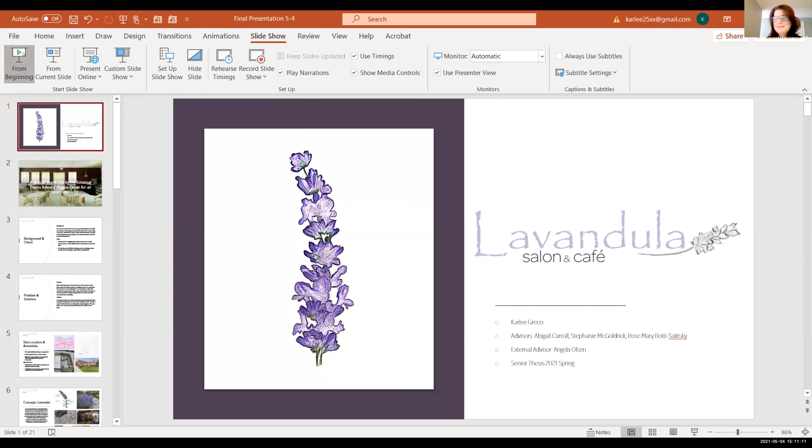Is it in presentation mode for everyone? Okay, I'm Karlee Greco, and this is my senior thesis presentation of Lavandula, Salon, and Café.

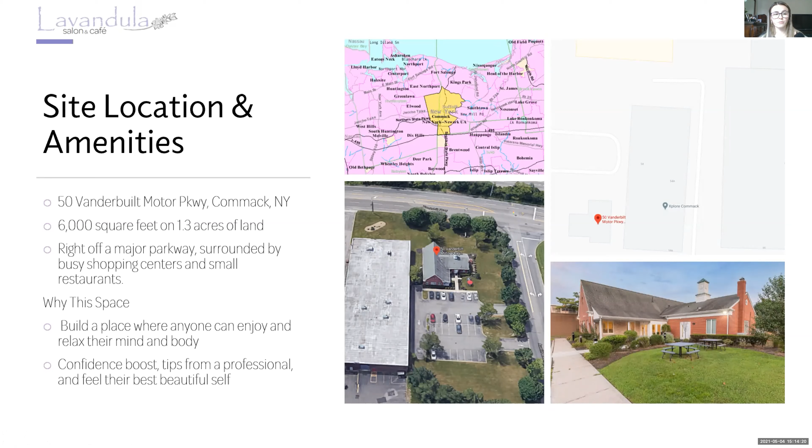The concept for this is lavender, thought of for this cafe for its natural and neutralistic color palette, also for its multiple purposes once the physical plant is broken down into different parts and segments. Lavender is also used in various ways to benefit one's health and physical appearance.

The plant is also believed to promote relaxation and treat anxiety and depression. The color purple is commonly associated with creativity, peace, pride, and independence—all of which I wanted to embody in this cafe and salon and in the people who are always there.

My parti model and exploration are parts of a whole. Once this plant is broken down, you'll see that the whole entire plant is known as a spike, and these smaller pieces are a corolla, calyx, and a peduncle, which is also a stem. You'll see these parts throughout my design process and in the furniture pieces and selections throughout the project.

Going further, I wanted to plan that this is a WELL Standard building, focusing primarily on air, water, nourishment, light, and mind.

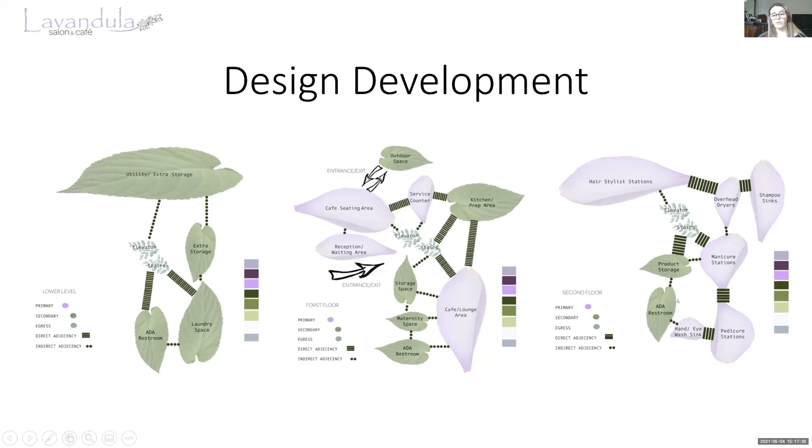Moving to the second floor, you would go up the elevator or stairs to the hairstylist stations, and going back further, you would go to the overhead dryers and shampoo sinks. Then moving down a small hallway, you would enter the manicure stations, product storage, another ADA restroom, and hand and eye wash sink and pedicure stations.

So as you can see, the floor plan did change a bit once entering the 3D process. On the first level is the reception cafe, service counter, kitchen prep, ADA restroom, maternity space, wellness space, employee break room, lounge area, and outdoor patio. But mainly in scope is the reception, service counter, and outdoor patio.

So for this first perspective, I mainly wanted to focus on the reception, or more of a check-in point. When you first enter the building, you would come to this check-in point and see where can I go from here, because on the second floor there is another reception desk, which you will see later. And I wanted to focus mainly on the well points of light and air.

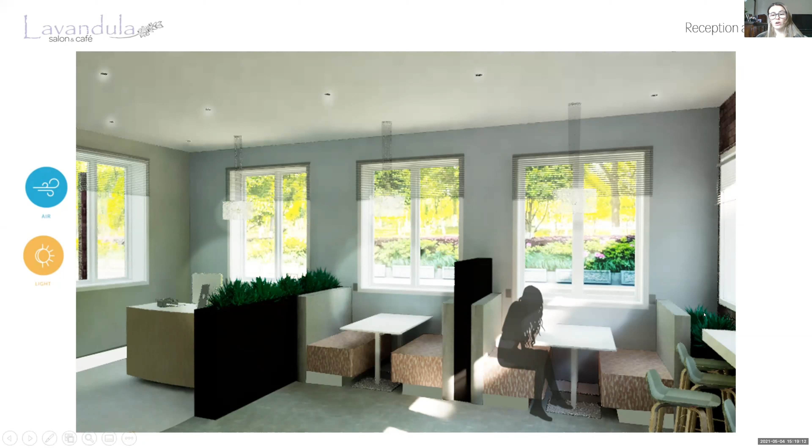This is because these light pendants can be controlled by the occupant, as well as the recessed cans, and the shades on these windows can also be controlled by the occupant in the space, mostly for maximum daylight capacity. And the air in this space is a smoke-free zone, just for the maximum capacity of the best quality of air. Also, as you can see in these planters, these are going to be locally sourced herbs that can be grown and used in recipes for the cafe.

And as far as nourishment goes, this is a lavender growing wall to be implemented into recipes, as well as water usage to see the filtration of how water is being used in this cafe.

Moving to the outdoor space, you can go through the back doors leading to the outdoor patio with all modular furniture integrated in, so if you want a smaller group you could do seating arrangements of 2 to 6, and the umbrellas as well as these canopy seats also have lighting integration into them. So that implements lighting which, when it gets duller outside, you can turn on or off depending on the occupant as well as mind.

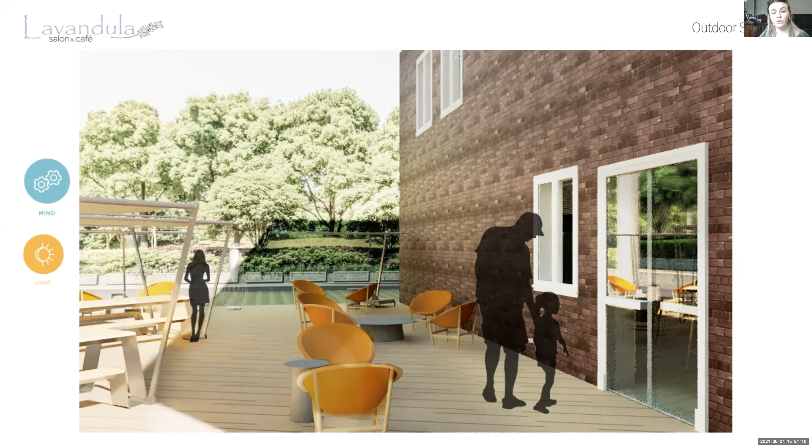Moving to the elevations of this space, we can see clearly that these booths and this reception desk are at ADA height for accessibility purposes. And these numbers are adjacent with the key plan, so each number is keyed to the direction that you are looking in.

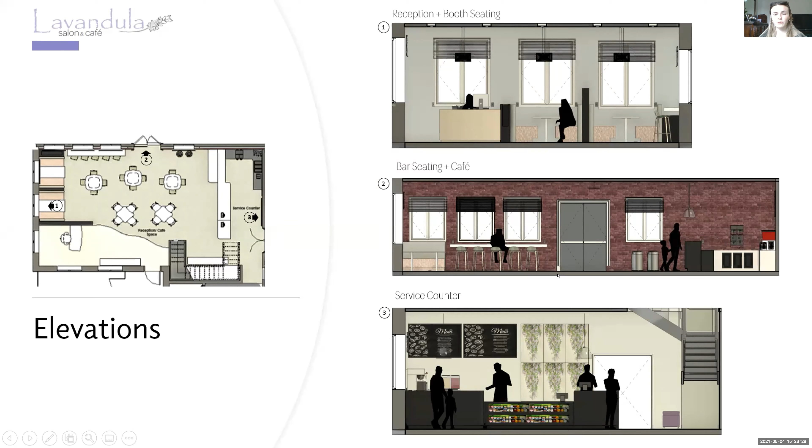So the second floor has the second reception and waiting area, the hairstylist stations, hair wash and drying stations, product storage and mixing area, and nail technician stations.

And again, mind — when you come to a hairstylist or anything to do with your hair, you usually would like to de-stress, and when you come here, you talk to them. They're more like your therapist than your hairstylist. Usually you talk to them mostly about your entire life.

Moving to the nail stylist stations of the pedicure chairs and the nail drying table, focusing mainly on air filtration, and again, mind. More air filtration because typically in a pedicure and manicure station setup, they're using a lot of chemicals that can be harmful to the body, more so with nail remover and anything that has to do with a spa treatment. So the air filtration systems on the second floor are a main key focus.

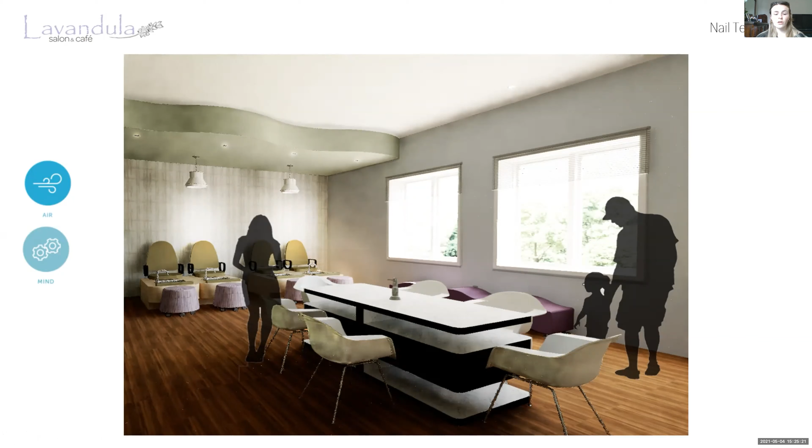And again, mind, because when you're trying to relax and get a pedicure, you really want to de-stress and just relax when you're doing that. And again, just some enlarged floor plans.

One of the hair stations, I really wanted to focus in on having a more bud or petaled shape around just the hairstylist stations, and also having these pilasters, which I was introduced to by my external advisor.

Just to absorb sound with acoustical panels on them, and the differentiating floors, because most of the time, people who are getting their hair done, if the stations are too close together to one another, they'll be bumping into each other, or if they have a moving station with them or a cart, they'll be too close to one another.

So I did make sure that each hair station was per COVID guidelines, and also just to make sure that they each did have enough space. They were 7 feet apart from the center of the chair to the next center of the chair.

And some materials that were used in this space are all bleach cleanable, just for COVID. And then moving to the next enlarged floor plan, speaking about mind again, and including the water standard for well and all the materials that were used in this space.

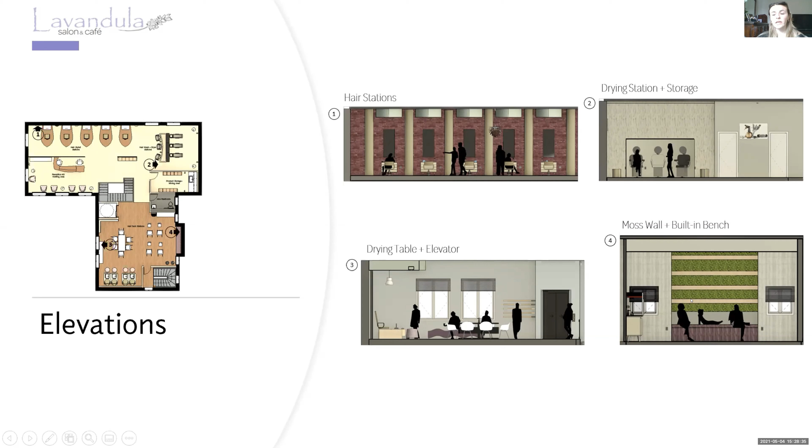Thank you. That is my presentation. Any questions or comments?

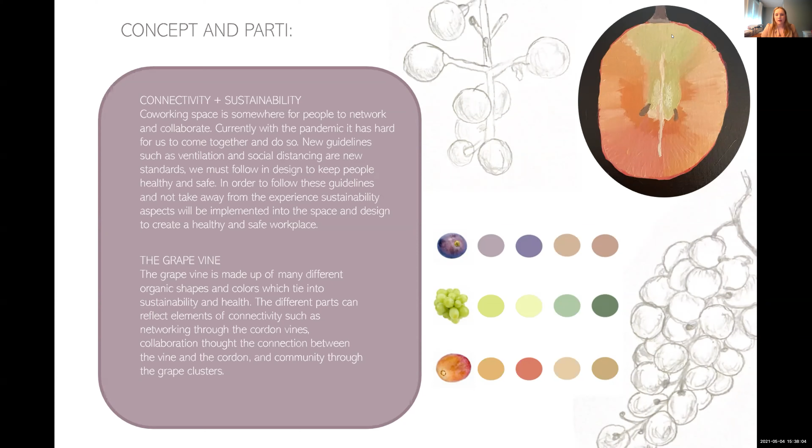On the right side of the screen are a couple of sketches that are also in the background of the slides throughout the presentation to show process. In the upper right corner is my parti exploration. I took a cross section of a grape to see what symmetrical features and colors I could use throughout the design, as well as a color exploration with three different colors of grape.

The program of the existing building includes three floors. The first floor is more for networking and collaboration, including flex spaces for work, community spaces, a public hall, and other amenities.

The second floor is more based on focused workspaces, including designated desks, private desks, and multi-purpose rooms. The multi-purpose rooms will also serve as private offices or meeting rooms that can be rented out. The third floor has a smaller footprint, including a library and an outdoor workspace.

I wanted to make implementations to the exterior of the building as well, to really create an attraction from the outside. Through this, we use an abundance of natural light to bring people in, since it's a nice work environment with daylight throughout the building, so it won't feel like that dark, claustrophobic workspace used before. This will be a new implementation.

Operable windows will provide proper ventilation, leading back to that source of staying a healthy and safe work environment. On this roof deck, it shows some visual interest. Not a lot of workspaces have outdoor areas, and this will promote sustainability along with the safe and healthy environment of social distancing. Right now we're doing a lot of things outdoors, and this will help with that as well.

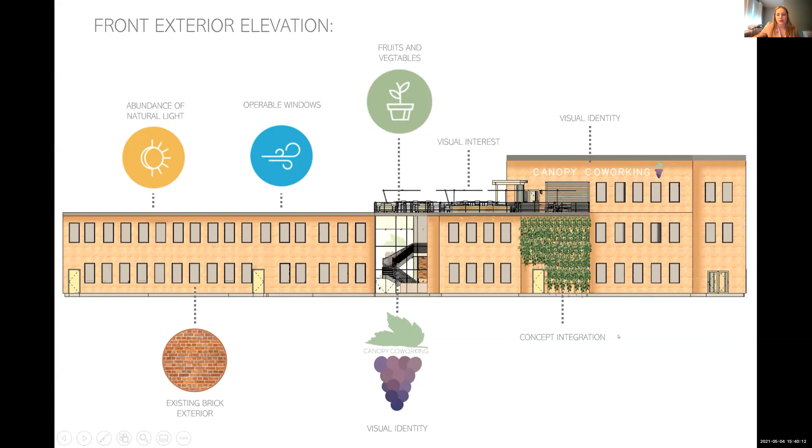On the roof deck, there is a garden that provides fresh fruits and vegetables to the kitchen areas and the cafe. On the exterior of the building, there's also visual identity with signage and this mural on the inside that's visible from outside. There's some concept integration through vines around the building.

Leading into my first focal space, which is the reception, the configuration of this space was chosen based off how people enter and what people go to first when they're entering. So if it's a new member that's just signing up, or someone coming in for the studios or a meeting, they'll come up to the reception and can be told where to go.

If it's a member, they can enter with easy access to the stairs right in front, and a bike storage room, which will promote them riding their bike to work and being a little bit healthier and safe for our environment. They also provide shower and changing rooms to help promote that. Leading into this main reception area to the check-in, there's a mail room on the left-hand side, so people can pick up or drop off their mail before heading to their workstation and checking in. Then lockers in the main lobby as well, and the elevator for proper access to the second floors, and some seating arrangements.

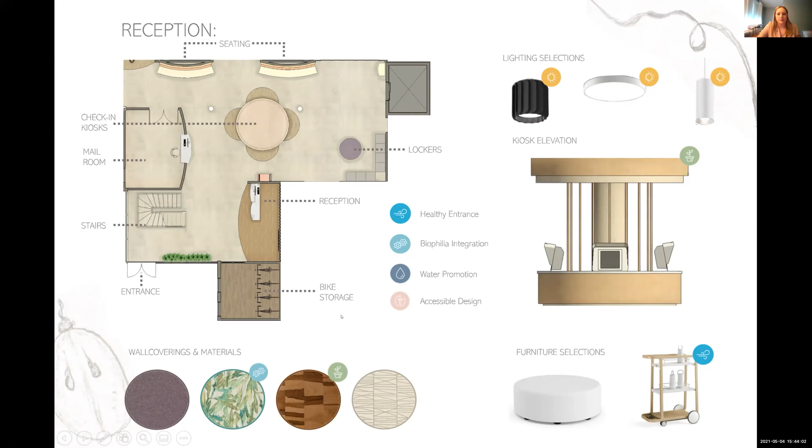Throughout this whole space, a lot of the spaces are multi-use. I feel as though that's very important for this type of work environment, so there can be a lot of different integration of activities. These private call rooms can be used for just a phone call. They have monitors in them for if you have to do a Zoom call, or they can just be used if you need to take a second out of the work environment.

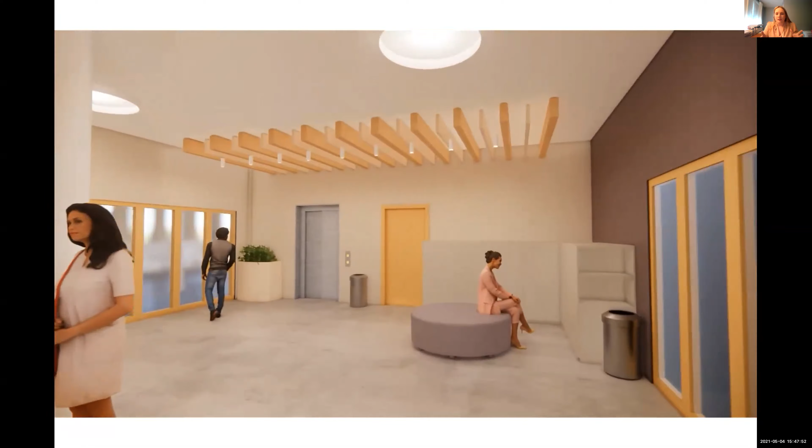This is the lockers with a ceiling detail of baffles on the ceiling. Then turning this corner right here to go down the hallway into the flex space, you meet the bathrooms and the little seating areas right outside of them.

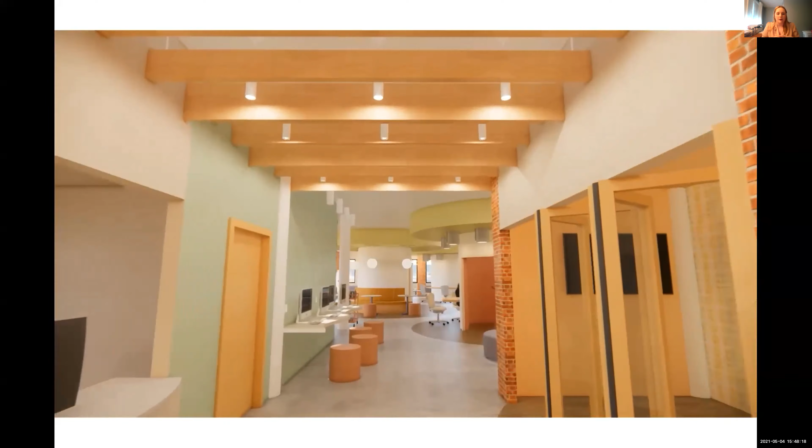Traveling down this hallway, there's the mailroom on your left-hand side and the print equipment room, as well as the two multi-purpose rooms on your right-hand side that can be used for multiple different things. And then the computer counter, where you can maybe use some programs that you don't have yourself or send prints over to the print room.

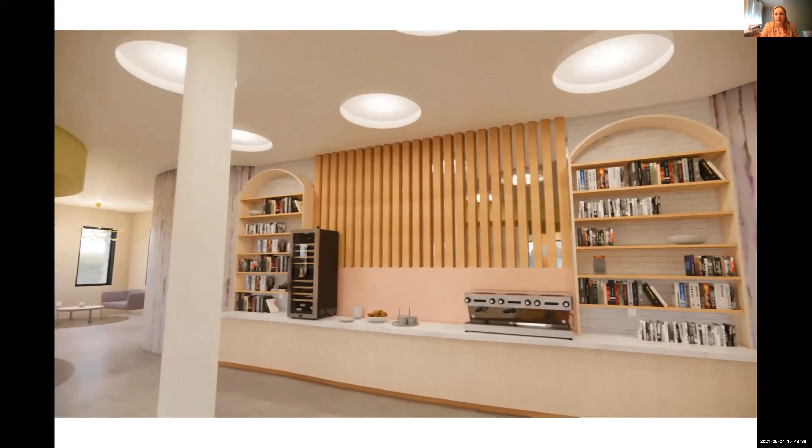Coming into where the private call rooms are surrounded by seating, you see someone taking a phone call in that room, and then the seating areas for workspaces around them. And the cafe located right next to those so people can get a drink or some food from the garden upstairs that will be available for anyone, and some books kind of for storage or use for anyone.

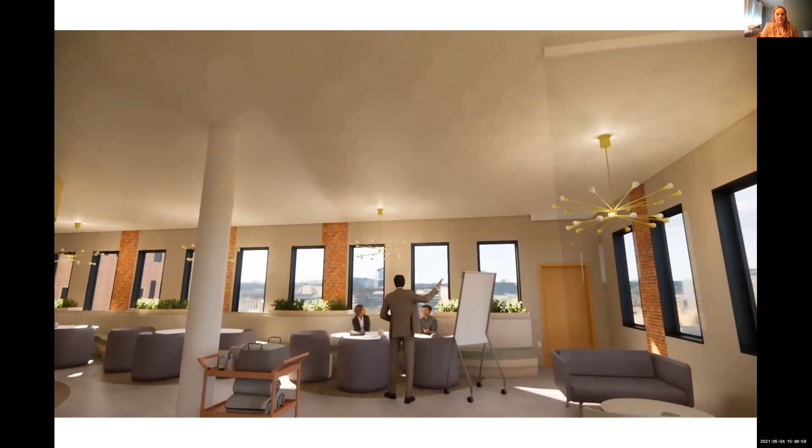And leading over to the touchdown spaces with the custom bench that leads all the way down the wall for some visual interest in the space, creating a focal point with some biophilic integration as well. And then leading back to the front of the flex space with two more multi-purpose rooms.

As you can see, there's the sanitization carts around the whole space, leading over to that locker space that is right near the workspaces, with some acoustical panels on the wall for detail as well.

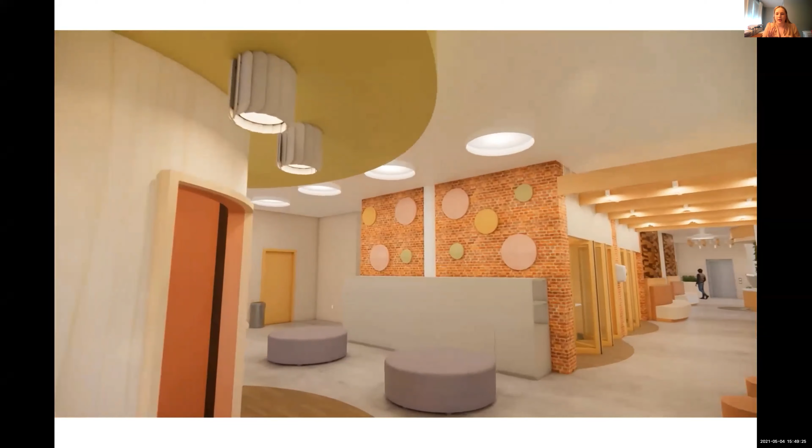Leading up to my second floor, which is not in scope of the design, this is the floor that's a little bit more focused and for workspaces that are a little bit quieter. On the left-hand side, there's a designated desk area.

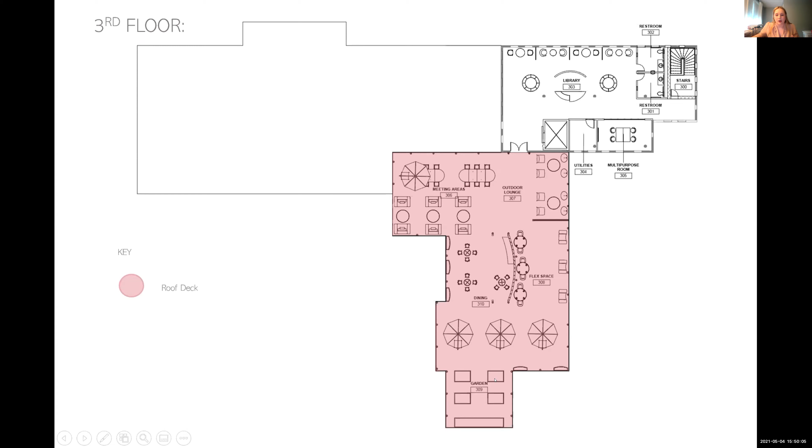This again shows a more focused area of that, an enlarged plan of the outdoor deck, showing those same spots. The furniture selections for this were really chosen for durability of the seasons. With an outdoor space, you want something that's going to last very well, especially up here in New England. And they all also have that organic sense to them.

The wellness implementations that are really brought out here are exterior active design and physical activity spaces. This outdoor area promotes people to get outside, get some fresh air away from the office, and really just be active. There's spaces for people to work out if they want to, and then those shower and changing rooms really promote them to do that as well.

There's biophilia integration with the large grass space area and some green walls and flower boxes, and the air quality, especially since it's outdoors, is very strong. The materials for this space are a lot more simple and just integrate those colors into it, because I didn't want to take away from the outside space and being in that natural environment.

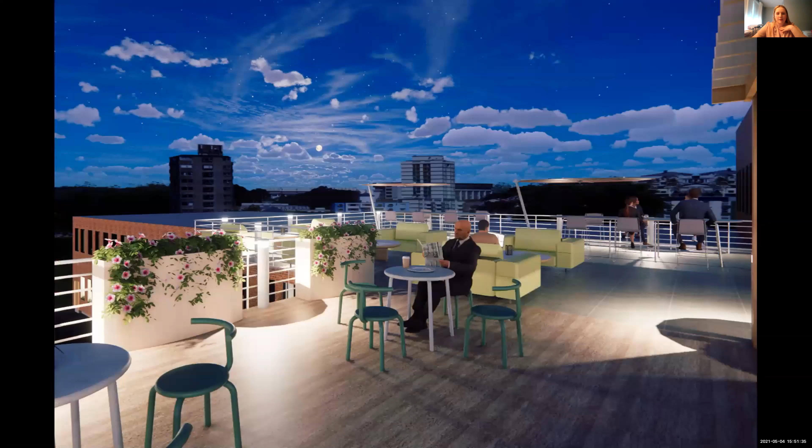This is a night perspective, and I just wanted to show this to show that it promotes people to even be out here at night with the nice lighting, and it can be a space that is used all the time.

So walking through that roof deck shows the meeting areas, both tall table and some lounge meeting areas, and then that dining area with the covered area for some networking events that can happen out here as well.

And that grass area where people are kind of working out, they can do some meditation, yoga up here, and the garden area as well with the covered seating.

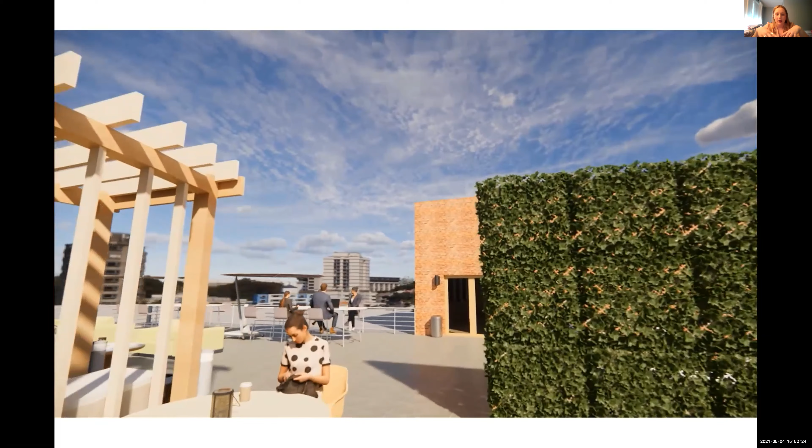Leading around the corner back to the front, some flex spaces where people can do some work on their own or just sit outside, get some fresh air. And then a separation, so if people are trying to focus over here with that green wall, they can focus away from the outdoor lounge area that is out here as well.

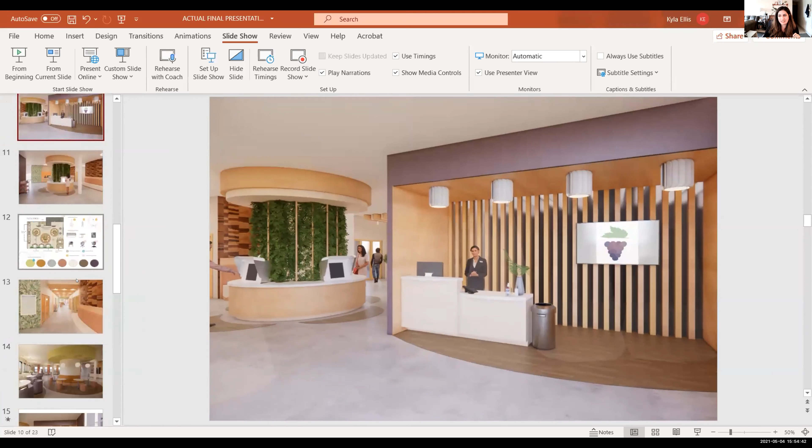You flipped through your perspectives so quickly that I wanted to see them because I know you worked so hard and they're so beautiful, but especially on the first floor, I feel like it was one second and flip, and I didn't really get to fully absorb it. I know you're probably nervous and speeding through it because you have so much to talk about, but I just wanted to point out the detail in them. I think they turned out really fabulous. Your use of materials was very descriptive. I like how you brought up important topics like acoustics and ergonomics, which are important in a workplace. And your walkthroughs were super helpful to understand how the space really feels.

Overall, I think I might be biased, but I think you did a really great job and I'm very proud. Thank you so much for your help. Yeah, of course.

I think you did a very thorough job, like Christina said. I think that all of the elements were very intentional and went back to your concept, which was nice to see that it carried through. Even the background on your slides was a nice little touch. The walkthroughs were really nice to see.

And I think that it's definitely a concept that will be necessary. I think it'll be interesting to see how this kind of concept continues in the future with places like WeWork and what they've gone through. But yeah, I think you did a super, super great job.

I also think that the rendered floor plans were really nice. It was very clear to see what we were looking at. So yeah, I think you did a great job. I don't really have many things to critique, I feel like. But great job, thank you so much.

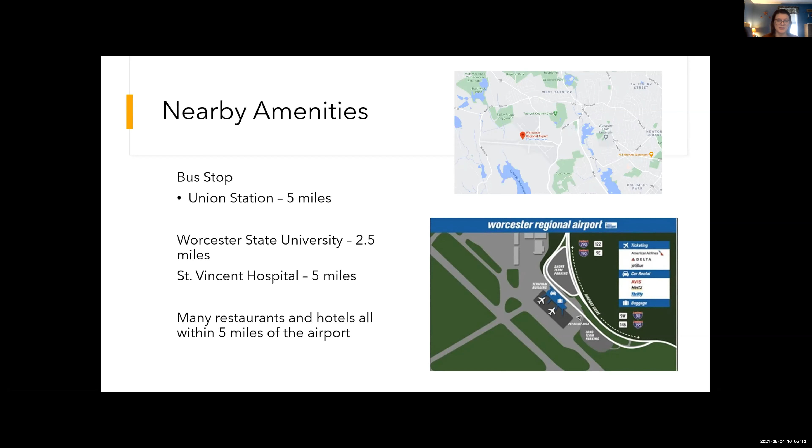So if you look lost, go up and ask if you need some help. There's also the check-in desk for the airlines and the offices behind it. There's a sundry shop that offers a little bit of food and some necessities, bathrooms, baggage claim, and the car rental.

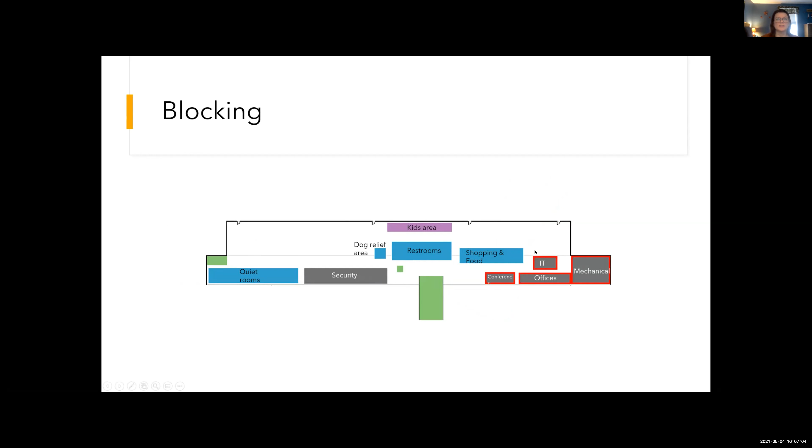So this is my blocking diagram for the second floor. It's changed since this, this is what it was at midterms. So what it started out as: you would come up the stairs, security, quiet rooms. This is the gate area, have a kids area, dog relief area, restrooms, shopping, and then back of house. But it's now since changed.

So you come up the stairs. To the left, you enter into security, and behind security is the child play area, and then there's 2 quiet rooms here. The gates are still all along the back. Here's the restrooms with the dog relief area, the family restroom, and then there's nursing rooms in the back of house.

So my first focus space was the play area. I noticed a lot of airports didn't really have a space designated to children. This airport did not, and I wanted to make it interesting. I didn't want to just stick a playground in because that's boring, so I wanted to find something that related to my concept.

So I have this play structure in here that's made out of wooden slats. The good thing about this is that not only children can play on it, but also adults can play, and no matter what your limitations are, you can find some ways to play with this, whether you crawl on it or if you run or jump. It can be used in whatever way you want, there's no right way to use it.

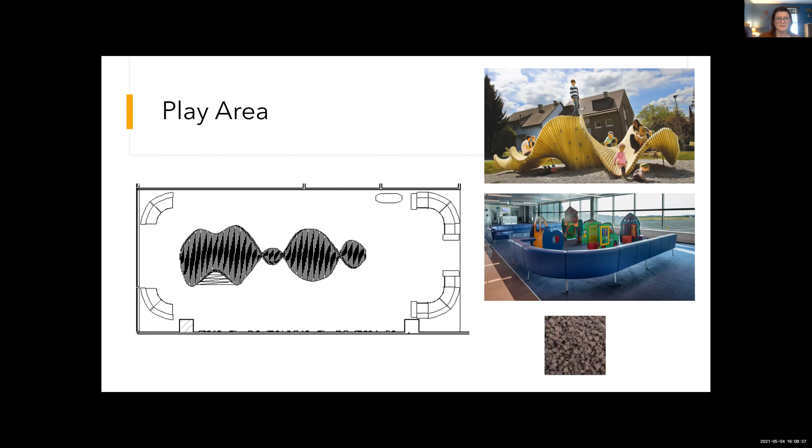I also wanted to do some cool and interesting things for the ceiling for the airport, since if you do something interesting on the floor, nobody's going to see it because there's people walking. So if you're going to do something interesting, you should rather do it towards the top where people can see. So there's custom lighting which mimics the lines of a topographic map for this.

My next space is the gate area. At the top, I have a picture of what I was thinking of doing at first, to copy the topographic lines of a map and make curved seating. But in implementation of that idea, I realized that there wasn't going to be enough seats for everybody.

So I switched to my second idea where I do have curved seating, but I also have other types of seating, because usually when you go to an airport they only have this bench seating here and there's no other options, and that might not be the most comfortable option for somebody. So I have the bench seating, but also this curved soft seating and power tables for people to charge their phones with stools, and then this fractal seat, which will allow people—because being in a big space can make you feel overwhelmed sometimes—to feel a little closed off, even though you're not.

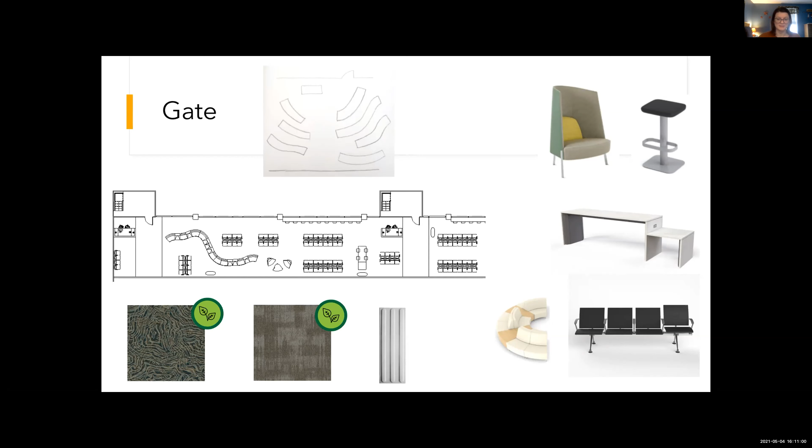So the restrooms are the third focus space I'm focusing on. Not only are there restrooms, but also a dog relief area, two restrooms, a family restroom, and two nursing rooms. I decided to implement a nursing room since this airport doesn't have one, and I put one on both sides because there could be transgender people or single dads raising a child who might want a private place to nurse their children, just like women have.

So the doors for these stalls, the restroom area, are open.

A lot of places are starting to implement lights on top of restrooms to show if they're occupied or not. But if somebody is colorblind, they won't be able to tell the difference between those lights. This design prevents the need for those lights, so you can just look and see whether the door is open or not.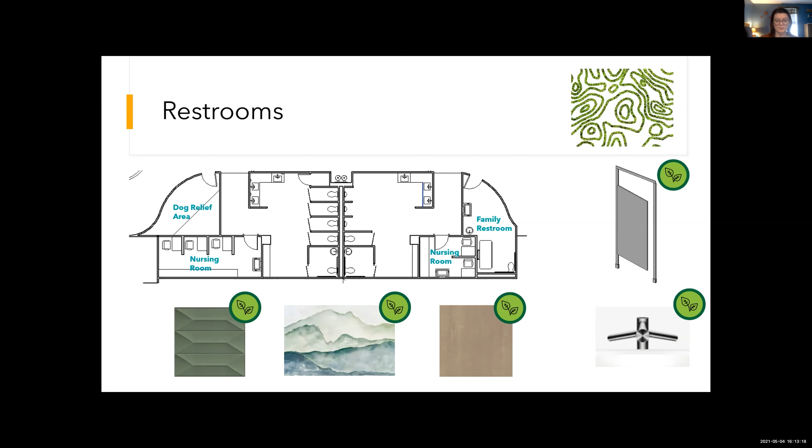Thank you. I'm going to stop sharing for a second. I have a walkthrough I need to pull up. It wouldn't let me put it into my presentation.

All right, so this starts in the gate area in the back, and you go by seeing all the different seating and the different materials.

Then you can see the white line on the bottom, which is the tactile flooring that people can follow. On the left is the green wall next to the water fountains.

Turning into the bathroom, there's not only a countertop in the front, but also one in the back, so if somebody wants to just look in the mirror, they have a space instead of taking up space at the sinks.

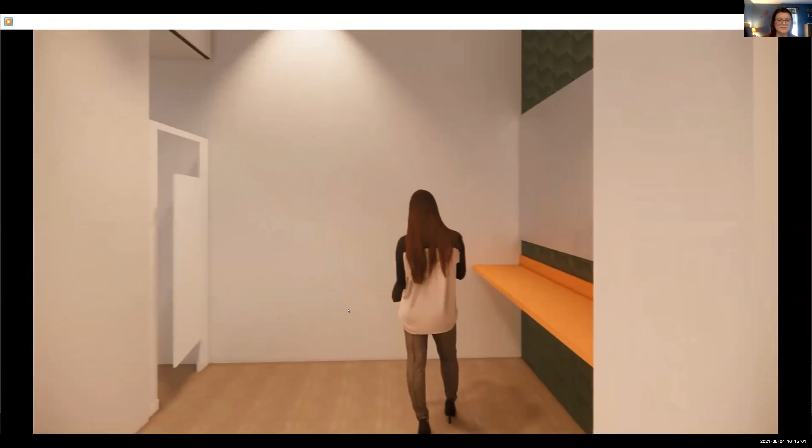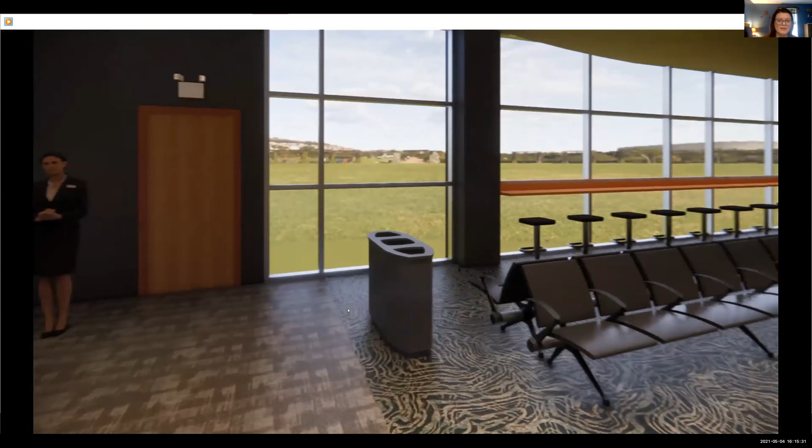Continuing onwards down the gate, we're going to get to the end and arrive at the play area.

And that concludes our presentation.

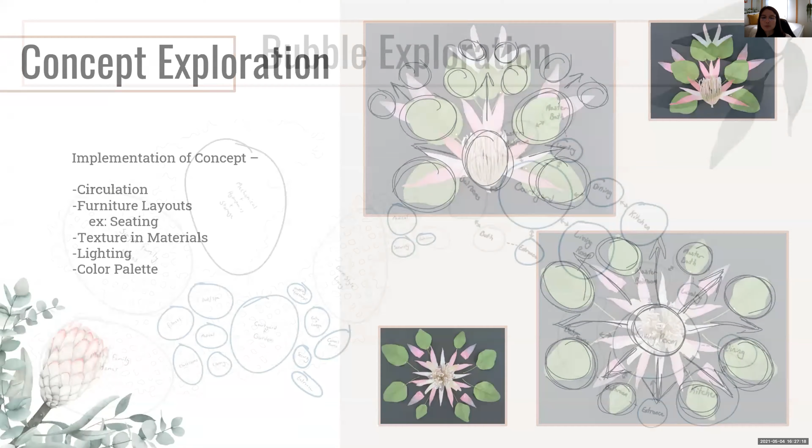This was my bubble exploration that I had at the very beginning. I took the initial site and figured out where I wanted these areas to be on the actual plan. Then I played around with how I wanted the floor plans of the residence areas to be, where you can see I have a courtyard area in the center localized between all the other necessities, or I also have a basic living room that doesn't have an outdoor private courtyard.

Now this is the overall site plan of the sanctuary. The residential expected capacity for single family units, in this more olive green area, is expected to be around 68 to 85 occupants, with an average household size of 4 to 5 people. The multifamily units, for bigger families or a larger community of people, shown here in lighter green, are expected to have 54 to 72 occupants, with an average household size for double families of 6 to 8, and for triple families of 9 to 12.

And then the dorm style units, all the way over here on the opposite side, are expected to have around 120 to 160 occupants, with an average household size of 3 to 4, but per unit would be 15 to 20. So overall, it's expected to have a capacity of 242 to 317 people.

So now when you actually walk into the area in the site plan of the bunker, there are going to be two different entrances. The main one will be coming in from the courtyard area right off the actual main road. You would have the main courtyard area where there would be a bunch of other areas and activities to get people out and congregating, making for a more communal, normalized living.

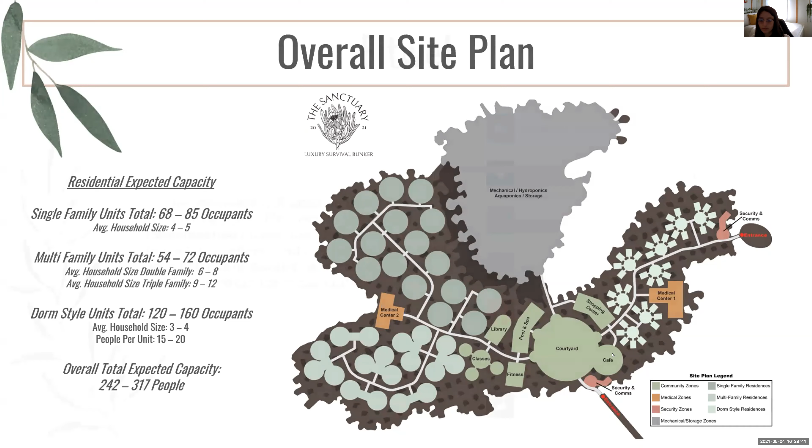Now, I did want to focus on Fitwel since this is a disaster relief and survival area. Fitwel would fit the best with it because it really looks at the impact of community health, supporting social equity and focusing on the community itself, providing healthy well-being for the communities.

One way I was going to incorporate that was some of the technology that would be used within the actual space. These are two things I found during my research: the Sky Factory eScape and SkyV. These are digital LED monitors that display the outside world and sky, working with circadian rhythm, as well as allowing anyone to choose a different outside view.

So you would still have windows within the space, and you'll see further on in my presentation where you'll be able to have your own view of maybe your own hometown or whatnot, and they would all combine together into one big 360 view throughout the whole entire house.

And then this other one I have is the Ketra lighting system using the Athena lighting controls. This is very similar to the lighting where it works on circadian rhythms, but this is more focused on daylight sensoring and adjustability, creating darker and lighter settings since you don't actually have the natural daylight of the sun. This is going to provide an atmosphere that gets cool and warm during sunset, sunrise, evening, and noontime.

Now, some of my focus spaces that I'll be having in this thesis are my security, the courtyard, and some of the residential areas. Moving on to the very first security area, when you walk in, there is going to be a centralized area of waiting and seating throughout the space where you're going to be dragged along.

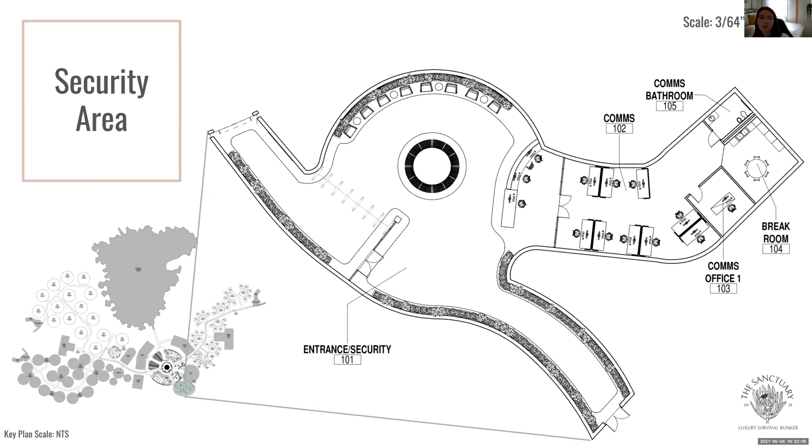And then just some circular seating and plants and stuff to bring in that nature.

Now this is the courtyard area. This is where you would be entering after you exit the security. This area here is going to be the biggest community space out of the whole entire bunker.

You're going to have seating areas with raised platforms of terraforming, where you're going to have a bunch of areas to play around in and kind of just relax and use it as your own space. You also do have the cafe that comes off of it with some actual outdoor seating, just in case you don't want to sit in there, and it kind of makes it feel like it's more of an outside space.

There also is a centralized column area that does have a waterfall feature to still kind of bring in this cool and relaxing feeling, focusing on that wellness of humans and everyone in there. And then there are actually two communal gardens.

Now there is an actual hydroponics and aquaponics and storage area in the very, very back of the bunker, which does have the main facility where it would be supplying all the needs and everything that's needed to survive in the bunker. But this community garden is to kind of bring together everyone, as well as being able to pick fresh herbs and stuff that you can keep for your household.

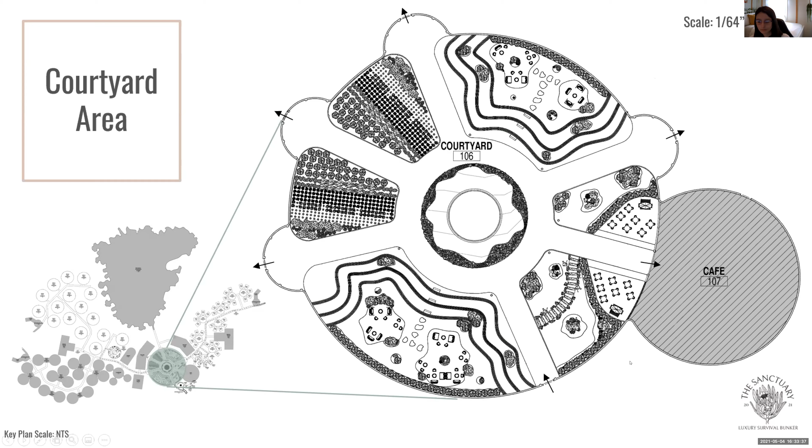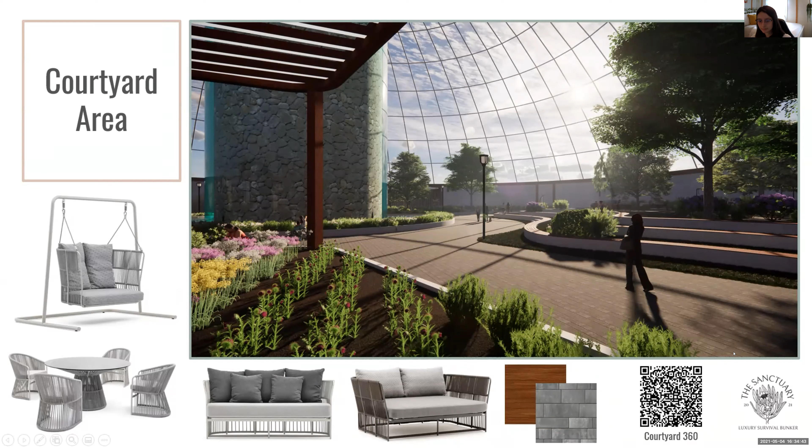Now this is going to be the walkthrough for the security and courtyard.

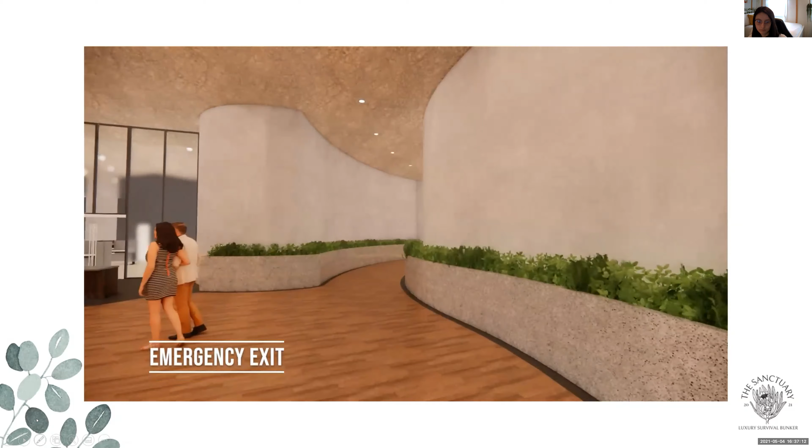Okay, now moving on to the residential area. This is one of the focus areas, and I decided to focus more on the single family units, as well as give you a little taste of how the layout would be for the dorm style.

What is expected in this area is, like I said earlier, the household size average of 4 to 5. You do have 4 bedrooms, as well as an optional flex space, which can be turned into a bedroom if you want. So when you do walk in, there is going to be an open floor plan area where you have your living room, your dining room area, as well as a nice sized kitchen.

Right when you do walk in, if you look straight ahead, you will have a private yard area similar to the courtyard, but it's more of your individual space where you can have maybe family come over or friends come over into this one individual space instead of having it out in the public.

And then as you gradually go around counterclockwise, you do have the laundry area that has some storage for any mechanical or just in general storage for furniture and items. And then you have the master bedroom with a walk-in closet, as well as a master bath and a separate water closet.

Going on, you have the 3 extra bedrooms that are pretty much the same size with the same closet. You do have an extra bathroom here for them to be using, as well as the flex space down here and a powder room right off the entrance.

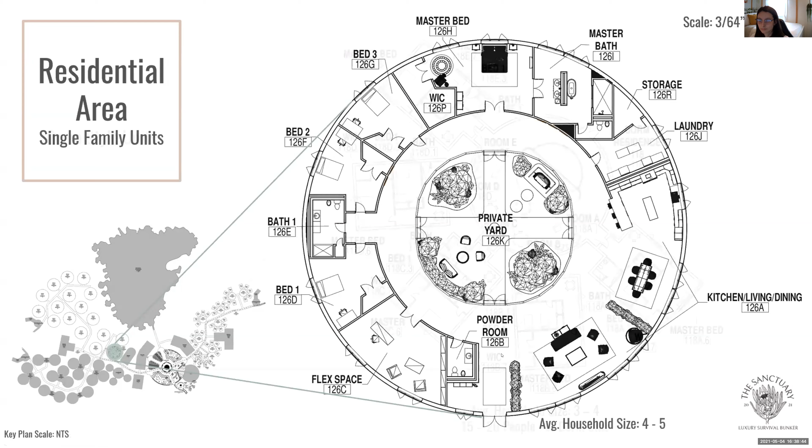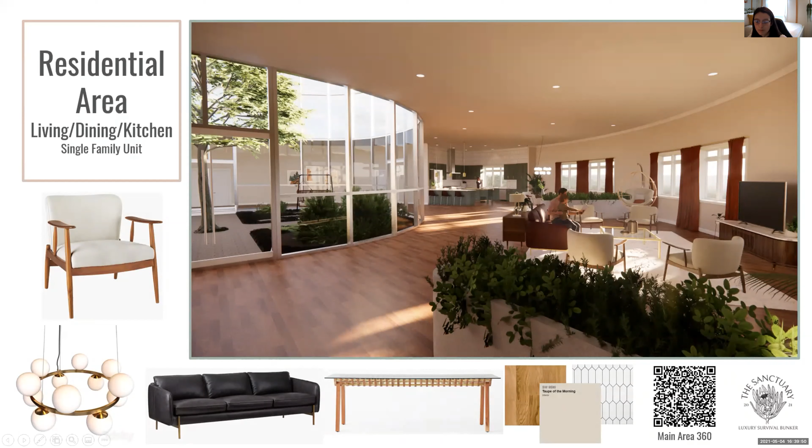Now this is the perspective of the living, dining, and kitchen area for that single family unit. You can see that I brought in a lot of nature and natural colors, still using texture, going back to my concept. I have a lot of leather and wood, natural spaces, kind of still bringing in the overall community. You can look through and be able to have a bunch of people come over within that actual bunker space. And then there is also a 360 panoramic for this space.

And then this is the single family bedroom and living, kitchen, dining walkthrough.

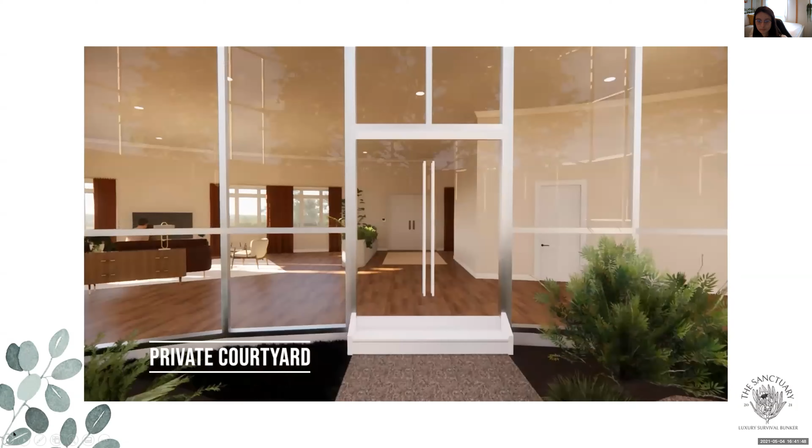And that is my project. Thank you to Rose, Stephanie, Abby, and Jill, who unfortunately cannot be here today, for their help with my questions and comments for my project.

Is there any questions or comments? Also, I apologize, the walkthroughs were supposed to have sound, I don't know how to fix that. Oh, they did have some sound? Oh, they didn't come through on mine. Oh okay, good, whew, all right.

Go ahead, I'm gonna open it up. What was that? Oh, I said I'll open it up for comment and feedback. Oh, okay, sorry.

I think you did an incredible job, I'm very impressed. If I ever have to live in a bunker, I want to live there. Yeah, I've never seen a bunker project before, so this was really cool. Definitely got some cool Truman Show vibes, but in a good way.

I like how you did the whole master plan and thought about different housing types and how people wanted to live differently in communities, or not in communities, with extended family, etc. And also thinking about what people would miss if they're living in a bunker, bringing in that outdoor world underground. Extremely thorough. I thought everything was really beautifully put together. I think this is a super cool project that you should go show Elon Musk or Richard Branson or someone. But awesome job.

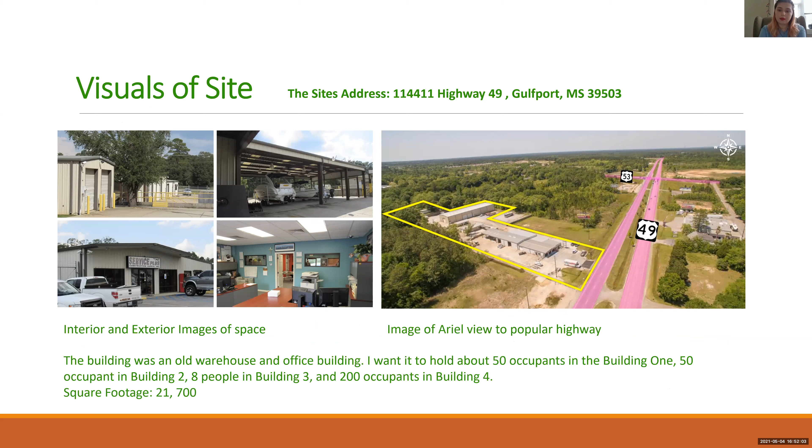A little bit about my site: it's located in Gulfport, Mississippi, right off of Highway 49. It was an old warehouse plus some office spaces. There are 4 buildings that I will use for this project, and the square footage is 21,700. At the bottom, you can see some of the occupancies that could take up the space.

It's 65 miles from New Orleans, Louisiana, another very popular vacation destination, and it's 15 minutes from a regional airport.

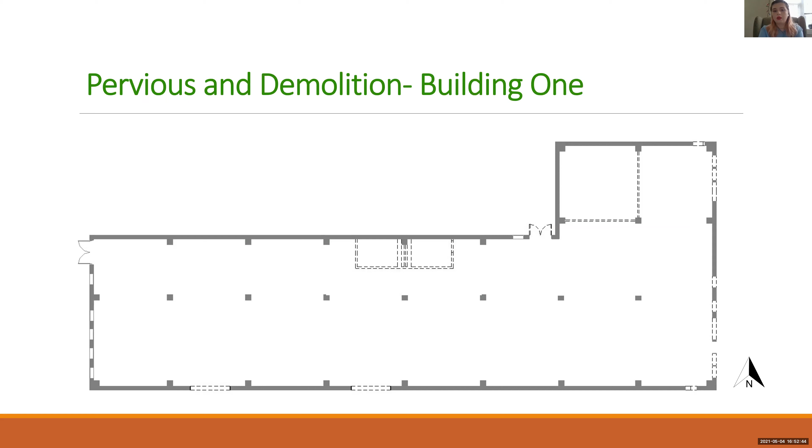Here's building one; the previous floor plan was demolition. So I'm taking out some of the walls and some of the garage doors that came with the warehouse, keeping some of them though. I'm not trying to take out the whole thing. I really want to take advantage of some of the existing walls already there.

And then, of course, taking advantage of those garage doors, especially in building 4, where it will be an education space, opening up to a higher occupancy. So having that circulation of the big garage doors so people can go in and out with ease.

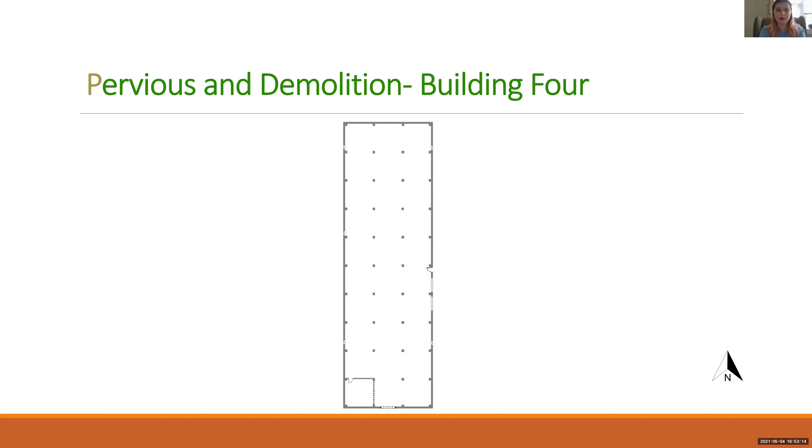So my concept for this project is gardening, specifically carrots, because when you think about cruelty-free, bunnies come to mind. It's on the logo of all cruelty-free products. And what do bunnies eat? Carrots. But when researching about carrots, I learned how they grow, similar to what I'm trying to do. Carrots are known for improving eyesight, and with this project I want to improve awareness of what's going on in industries and manufacturers that are using animals for testing. Here are some inspiration images.

I was really drawn to ceilings, and because I have different areas, I really wanted to take advantage of those ceilings, plus they are higher up. They are 10 feet, and I really wanted to take advantage of those ceilings that they do have.

Here are some process sketches. There will be solar panels incorporated throughout the building because, as you can tell in the existing photos, it's an open space, so the solar panels would be great for that space. Also looking at lighting and shelving in the space. Here's some program schematics, my block diagram, my adjacency matrix, and here is my bubble diagram through the whole buildings.

For this building, I'm hoping to get WELL certified. There will be some ADA universal design throughout and sustainable qualities, but for this space, what really drew me to WELL was that it's not just growing awareness about animals, but how we affect animals as well. I feel like when you have a space that brings happiness, the mentality to learn and take in all this knowledge is great for it.

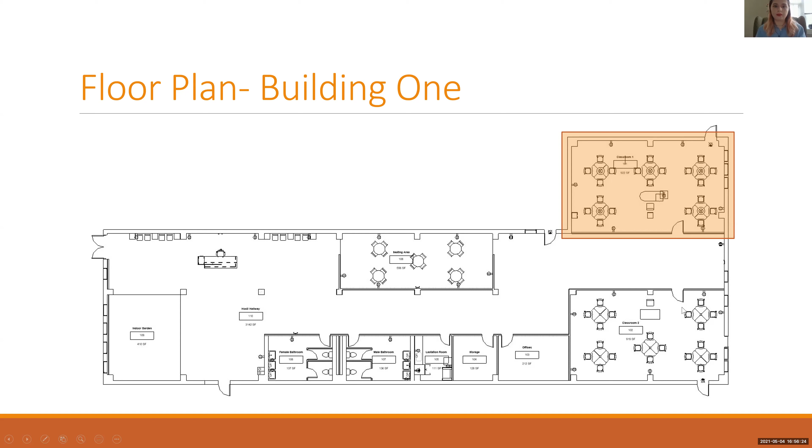So here's building 2 and 3. Building 2 is this retail space right here. There are either doors on either side where the checkout area will be, and some storage throughout, again with a break room and a gender neutral bathroom. And then here is the changing area.

So looking through the requirements, I saw that one was an area to change, and this promotes people to ride bikes or to be more community-oriented in traveling. Some people take public transportation, so it was important that if they needed somewhere to change, they could change. And here is a locker/bike storage.

And onto building 4, which is the education space. Again, taking advantage of these garage doors right here, having a big space for people to walk in and out, and of course promoting that air circulation with natural air coming in.

So you'll be greeted by a checkout host area person here, and all throughout the spaces are booth areas that different organizations or companies can come in and rent and talk about how important it is to be cruelty-free and the importance of animal awareness.

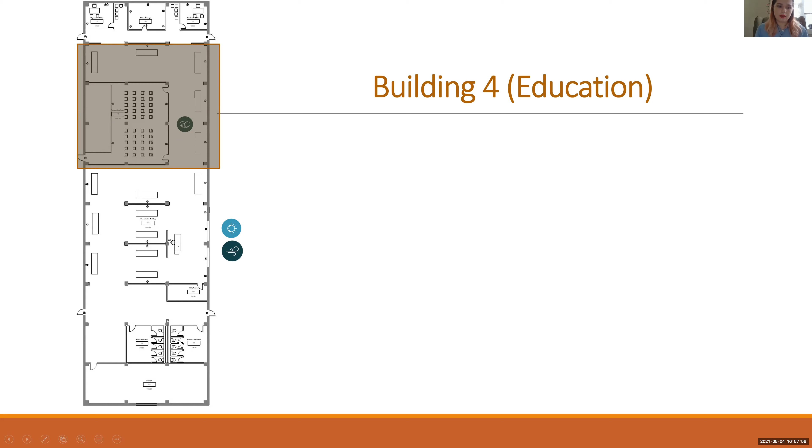Over here is a presentation area, and then here are offices and a storage office area for the people renting the booths. Over here, a utility area, and again the bathrooms and more storage.

A lot of these colors I use, like the greens, the oranges, but also keeping neutral colors in as well. Again, the curves for circulation, how will people travel through the spaces? So the sustainability area and indoor garden was important to me because this is mainly a children's area in building 1, where children will learn about animals, but also the importance of the environment and how the environment, animals, and humans all coexist together.

So you can see some of the elevations here, as well as a perspective of it. Being greeted by the garden not only promotes sustainable eating and healthier habits, but it just brings a better mood to people. And when people are in a better mood, they retain more information and learn more.

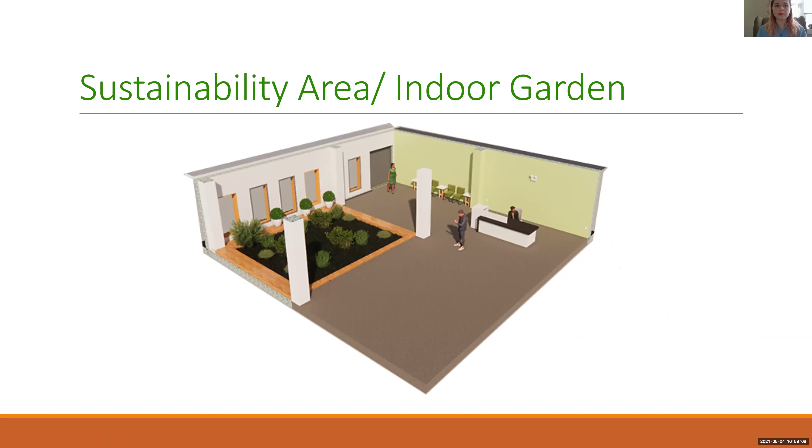So here's the focus 1 area of the classroom. There's a barcode for the 360 panorama. You would enter through here, and this is an exit door right here. There's a bunch of seating here, and these are seatings in case they want to sit somewhere or sit as a community.

So here's some FF&E. These are blinds that are automated. A lot of these paints are by Sherwin-Williams because they have low VOCs. And these are Interface carpets that have recycled material in them. And the furniture right here, this chair and this desk, are from KI. And this was from Lakeshore.

I was drawn to this piece at first for children's seating because I wanted something more fun than a traditional seat. But going through, Bethany and Abby, a couple other people pointed out how it might not be the safest option, but I still wanted to add it in anyway.

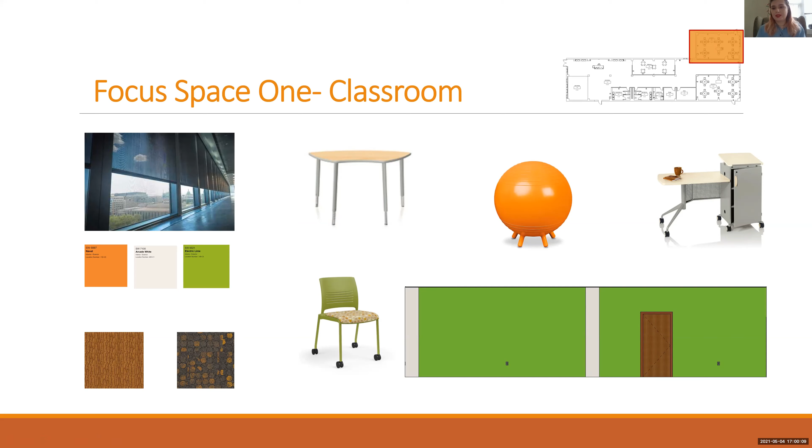So again, the importance on the ceiling plan for me was because I wanted to bring something cohesive, because again, you're growing, and when you're growing, it goes up. So I wanted to pay attention to that ceiling detail.

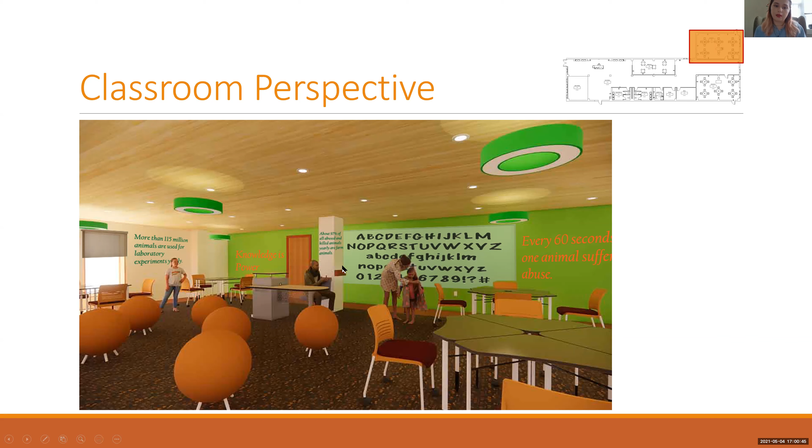So here is my perspective of the classroom. Big graphics everywhere, because you want kids and everyone in the space to retain as much information as they can. Over here is a whiteboard, a glass board where they can write on it, either teachers or the students. And then this is my walkthrough of the classroom.

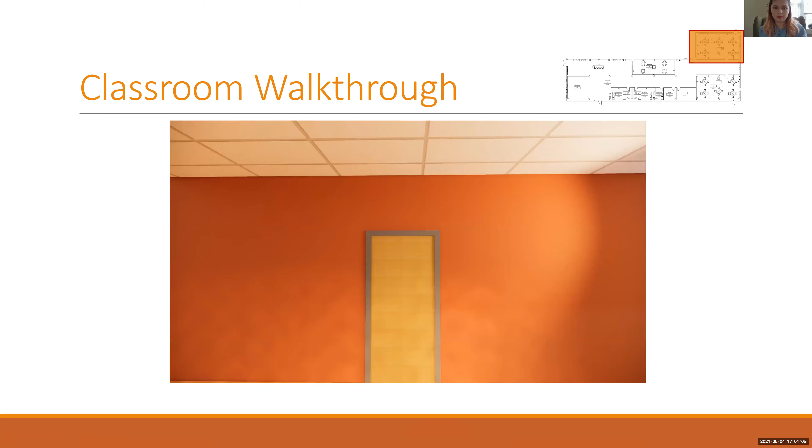All right, so moving on to the second focus space is my retail space. Again, the panorama barcode is right here.

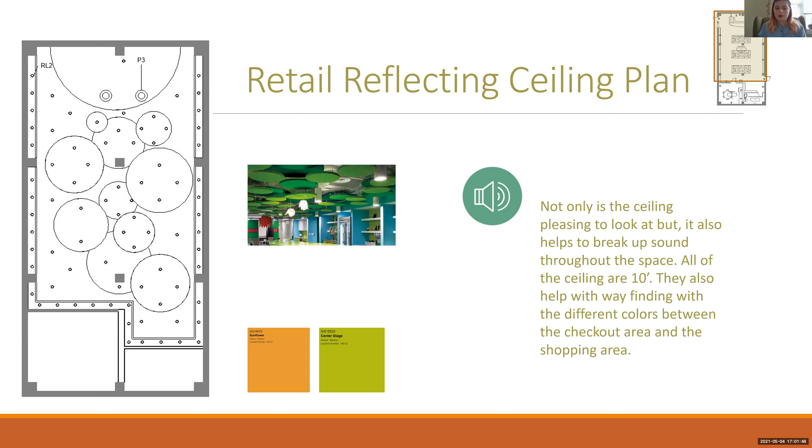So for the reflective ceiling plans, I found these really cool ceiling panels from Armstrong. They do have some sustainable qualities to them, and they helped to break up the space. Not only do they look nice, but they help break up the sound. And also for wayfinding, you will see in the perspectives how the checkout and the shopping area have different colors for the acoustic ceiling panels.

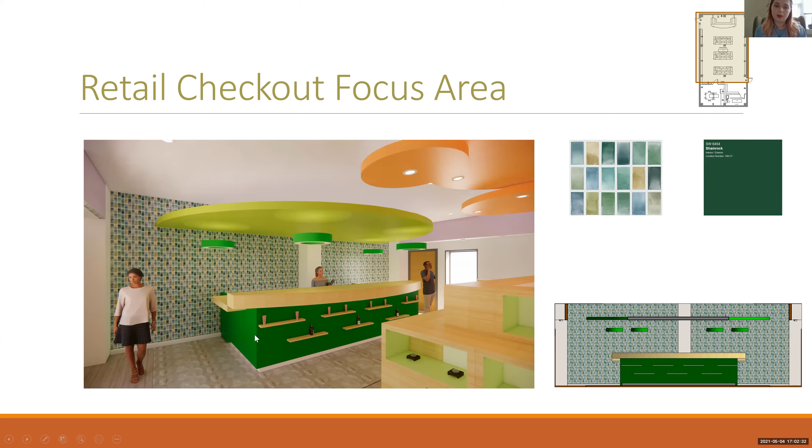And then this is my retail checkout focus area. This wall covering is from Knowles, and again, it does have some recycled material in it, and another paint color from Sherwin-Williams that went along with this custom checkout area. So this is the retail walkthrough.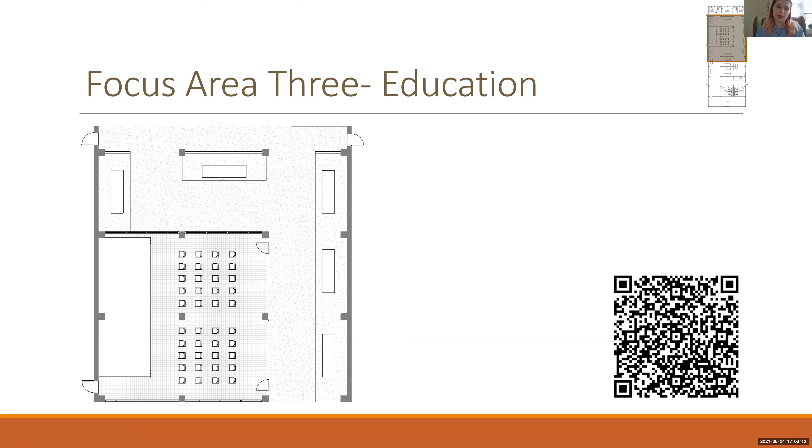Forbo is very sanitary, so finding flooring that's sanitary and can be cleaned easily. Again, some Sherwin-Williams paint and a green wall to promote healthy air circulation.

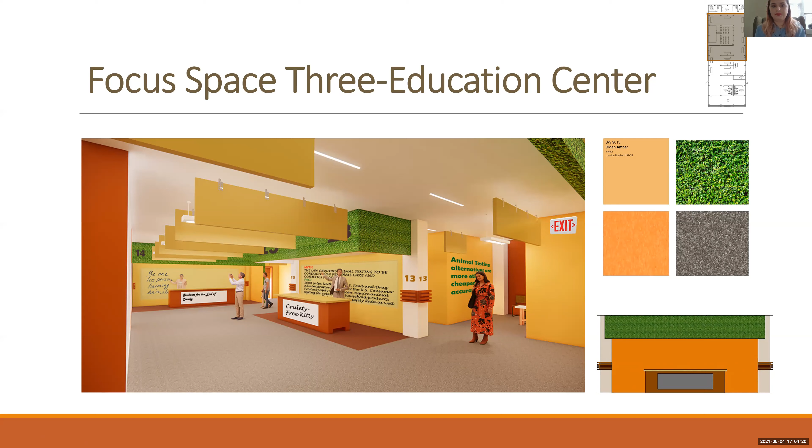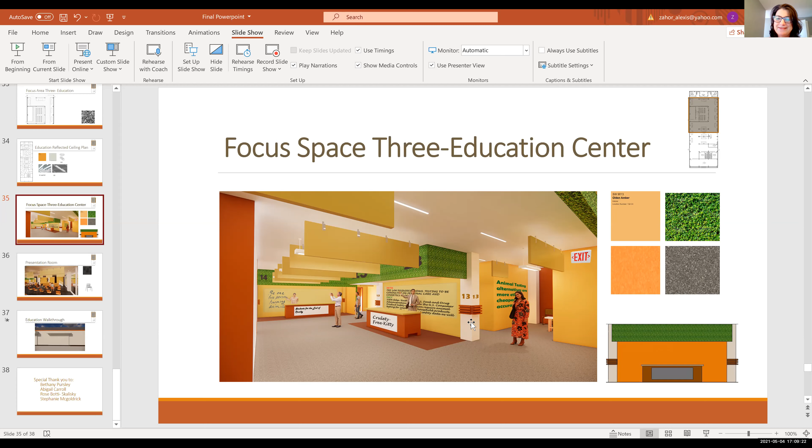All right, wow, group 2 is done. Woohoo! You guys did a great job. Thank you so much to all the external critics.